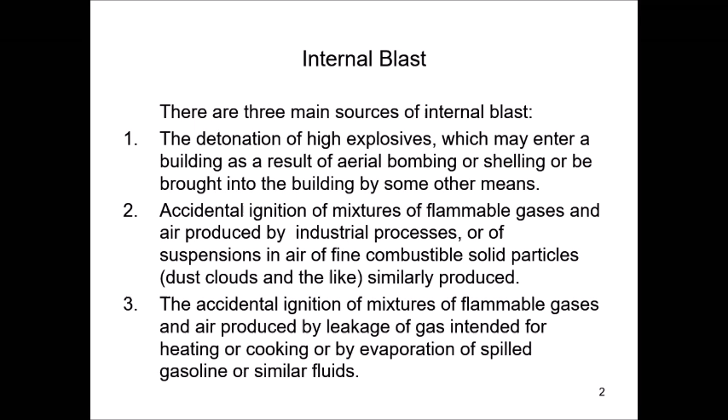In terms of characteristics of the resultant blast, the main distinction to be drawn is that between the detonation of high explosive and the deflagration, which is a more or less rapid explosion produced by gaseous mixtures or fine solid suspension.

The first, the detonation, is independent of atmospheric oxygen and leads to a very rapid production of large quantities of very high temperature gas in a very small space. That's a detonation.

This gives initially at the source of the explosion a very high but very localized pressure rise, which leads to a shock wave expanding away from the source at speeds greater than the speed of sound, and approximately 1,000 meters per second.

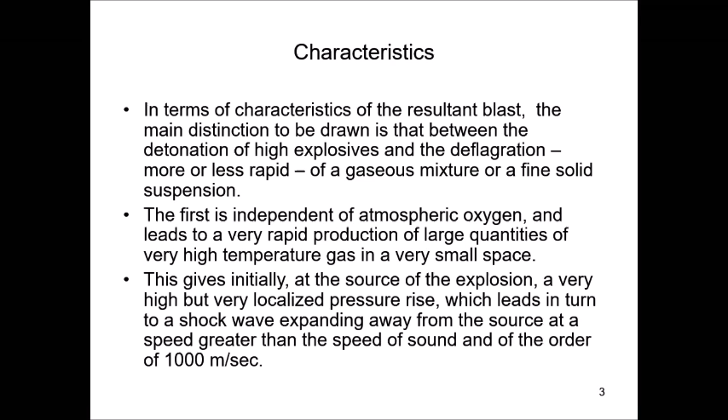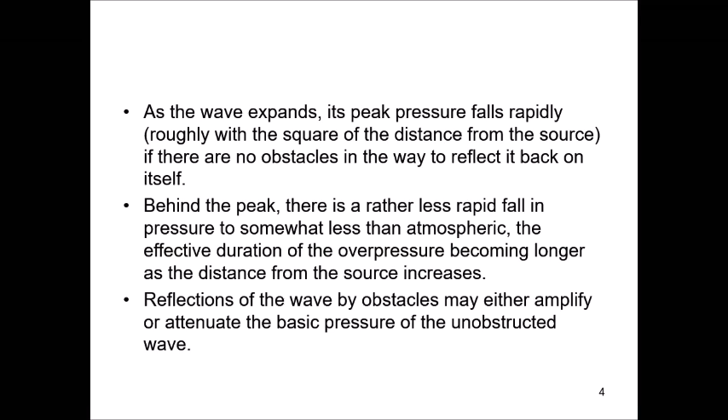As the wave expands, its peak pressure falls rapidly off with distance, and behind the peak there's a rather less rapid fall in pressure to somewhat less than atmospheric pressure. The effective duration of the overpressure becomes longer as the distance from the source increases, and reflections of the wave by obstacles may either amplify or attenuate the basic pressure.

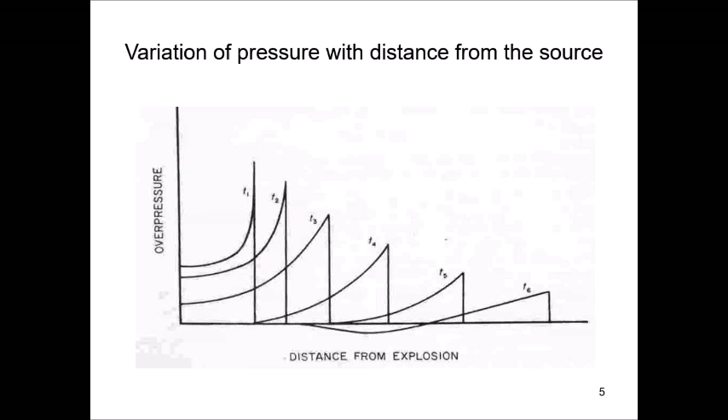This shows the variation of pressure from a detonation outside of a building, external to a building. As you can see, the pressure decreases with distance. We have the overpressure, distance, and at this point we have a positive phase duration and a negative phase duration. This is a characteristic shock emanating from the source.

But when the explosion takes place inside of a building, there will be reflections, even when some of the floors or walls have been blown apart. This will tend to prolong the duration of the pressure above atmospheric throughout the space.

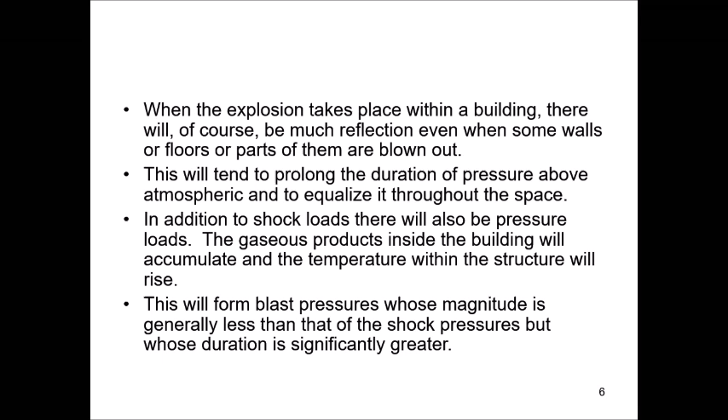In addition to shock loads, there will be also pressure loads. The gaseous products inside the building will accumulate and the temperature within the structure will rise. This will form blast pressures whose magnitude is generally less than that of the shock pressure, but whose duration is significantly greater. For example, this is a depiction of a point source explosion inside of an enclosure.

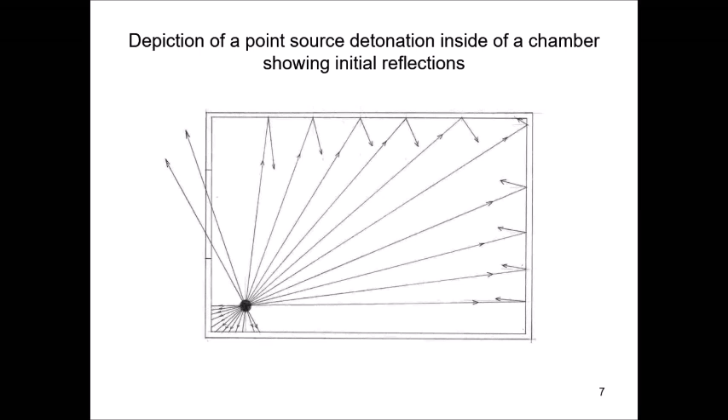So you see the ceiling, the walls, the floor, and you can see an opening at the left side. The explosion takes place in the lower left-hand corner, and you see reflections from the walls, as long as they are not blown apart. This is an approximate depiction of what can happen inside of a building.

This shows how the loading is going to be on the walls, ceilings, etc. You have a shock loading, which lasts a short time, and then the gaseous product loading lasts a lot longer because of the reflections of the product. Okay, so much for this basic stuff.

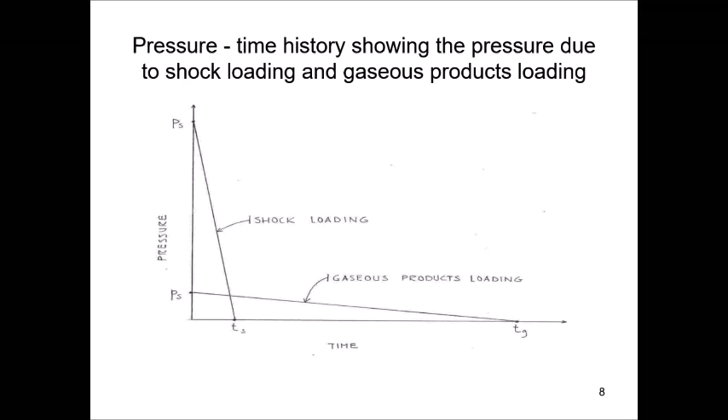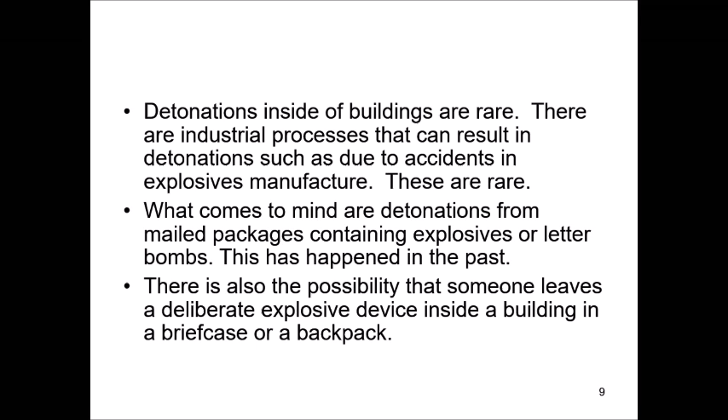But detonations inside of buildings are rare, very rare. They can be produced by processes that result in detonations, for example in manufacture. What comes to mind are detonations from mail packages containing explosives, or letter bombs. There's also the possibility of someone leaving a briefcase or a backpack containing explosives. So those could become detonations inside of buildings.

You may recall that the London Underground bombing, which took place on July 7, 2005, and the Madrid train bombing, which took place on March 11, 2004, can be considered internal explosions, where the terrorists brought on board backpacks containing explosives. These were relatively small bombs. Those in London weighed about 10 pounds each, and those in Madrid about 22 pounds each.

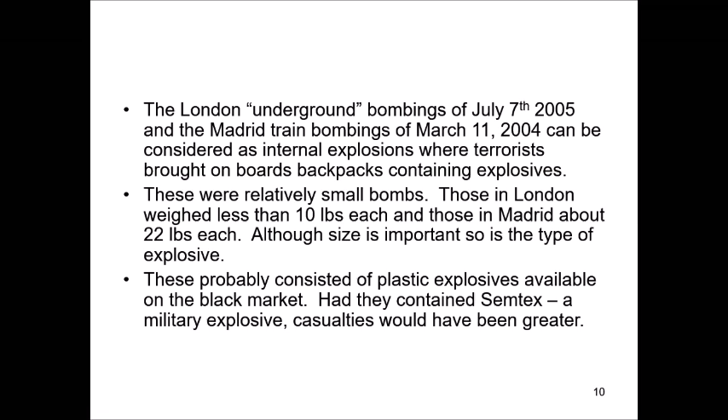The size is important, but so is the type of explosive that's important. These explosives probably consisted of plastic explosives, which are available on the black market. Had they contained Semtex, a military explosive, casualties would have been much greater.

Now let me briefly introduce one small subject, internal explosions produced by aerial bombs. This is a World War II experience.

What I'm going to show you here is a report produced by an engineer of an explosion which took place in London, England. You will notice it took place in 1943, May 1943. So what happened here is a German bomb weighing 550 pounds hit the roof of this building.

It broke the roof, broke the second floor, first floor, and exploded in the basement. This picture shows the shock waves emanating from the explosion. It shows the damage produced by the blast, both in this picture and in the plan view. This was a very long sheet, so I had to break it into two parts. This part shows the damage to the floor systems. The cracks are shown over here.

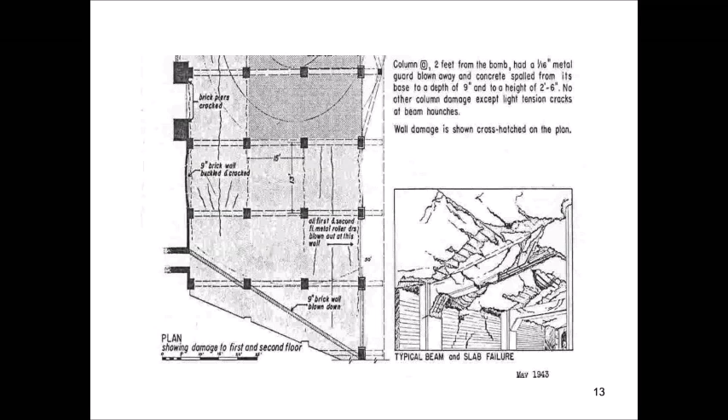Over on the right side, you see a picture of what happened to slab and beams inside that building. This whole report was prepared by an engineer in England in 1943, and the pictures are shown on the left side, description of damage. The building is described, damage is described, and this is done very well.

Keep in mind that this took place in 1943. Cameras were not available at that time like we have now. So you see, this was done by an engineer who very carefully went out to the site, inspected the damage, made a lot of sketches, drew things up by hand, and did a very good job. It impressed me very much what can be done without a camera. This was a very well done report, one-page report, and it shows you an internal explosion produced by an aerial bomb.

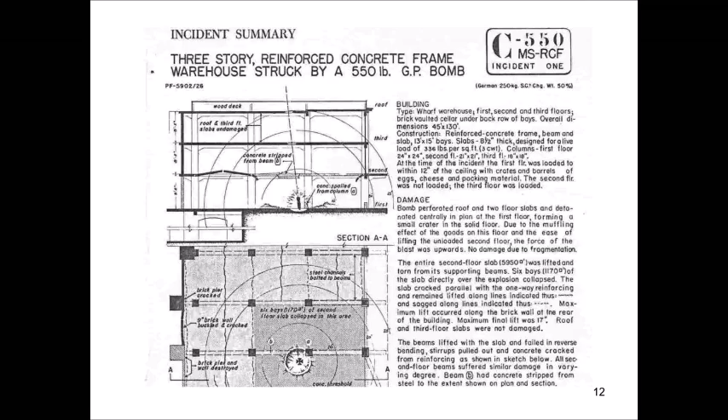Okay, now we get to the main topic of this presentation, the internal explosion inside the World Trade Center, which took place on February 26, 1993. It's a long time ago now, but still it was an important event.

On Friday, February 26, 1993, about 1,800 pounds of explosives ripped through the 6 sub-basement floors that housed operations such as maintenance offices, primary and secondary power plants, fire safety, communication, refrigeration systems, and public parking, tenant and public parking. The man drove up in this van containing these explosives, left it there, and detonated it.

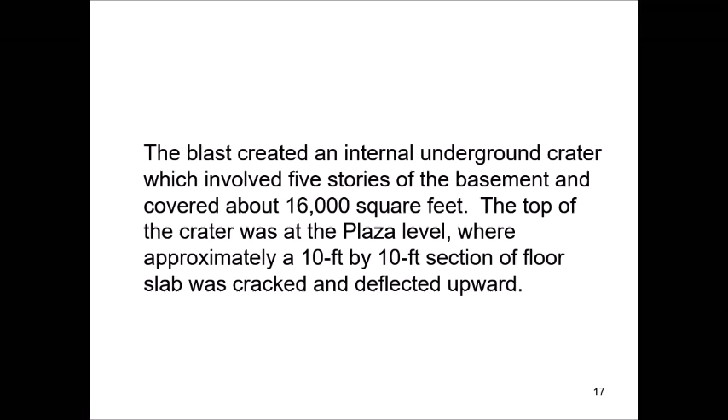On the next level, the concourse - let me go back here. So this is the concourse. On the concourse level, a plaster on lath ceiling collapsed in the lobby of the Vista Hotel. Directly below the collapsed ceiling, there was a hole in the slab of approximately 18 by 22 feet, which is about 396 square feet, made by the explosion below.

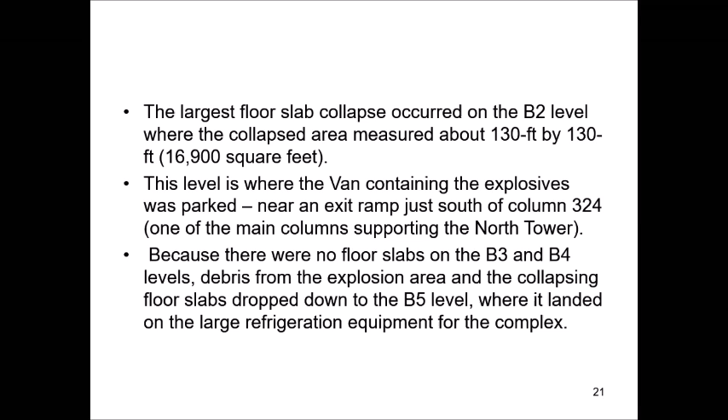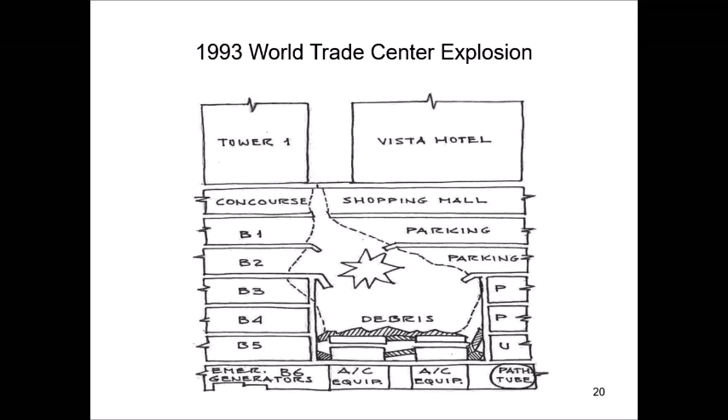So we go next to here. Because there were no floor slabs at B3 and B4 level, there were no floors. There were no floor slabs, so the debris fell down onto the AC equipment.

This again shows the same thing we just talked about. You see the Vista Hotel, you see level B2 where the van was parked, and that's where the explosion took place. And then you see B3 and B4 levels had no floor slabs. So basically 2 floor slabs were damaged.

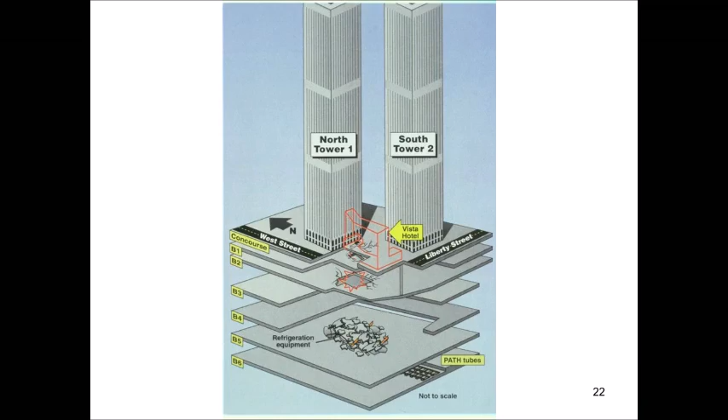And even into the Vista Hotel, the floor was damaged. So this was a big explosion. And you can see the 2 towers and so on. So let's go on, so what was used?

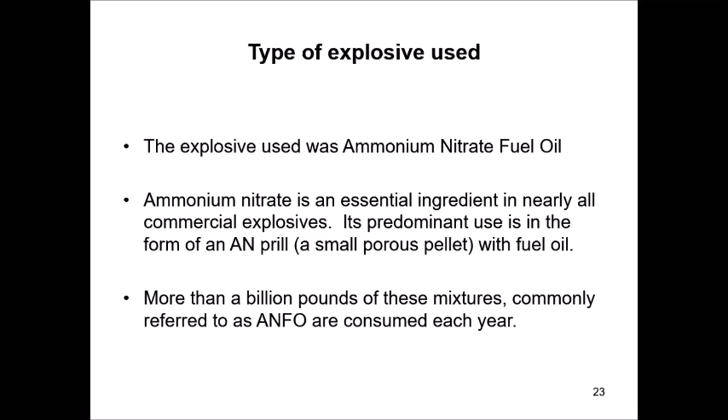The explosive used was ammonium nitrate fuel oil. And ammonium nitrate is an essential ingredient in nearly all commercial explosives in this country. More than 1 billion pounds of these mixtures, commonly referred to as ANFO, are consumed each year in the States. They account for approximately 80% of the domestic commercial explosive market.

ANFO products have found extensive use in a variety of blasting operations: surface mining, metal mining, quarrying, construction. Their popularity has increased because of economy and convenience. The most widely used ANFO product is an oxygen-balanced, free-flowing mixture of about 94% ammonium nitrate prills and 6% number 2 diesel fuel oil.

And of course, you need to have blasting caps to set the whole thing off. You need to know how to mix it properly. And apparently this particular person who did that was quite adept at doing what needs to be done to create a good explosion.

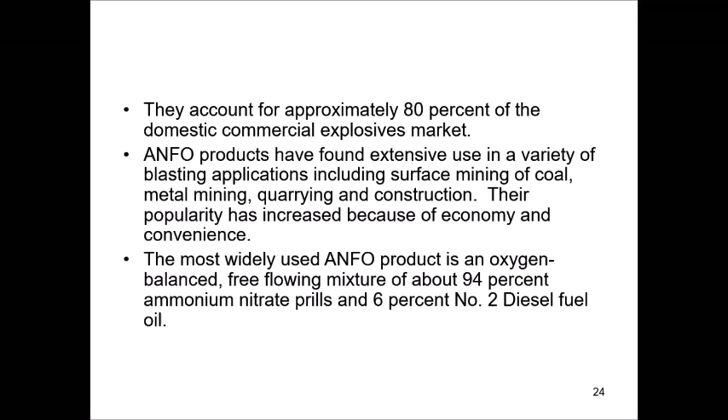Other damage in the basement area: concrete block walls on the B1 and B2 levels were severely damaged. Damaged walls included those enclosing rooms, stairways, elevator shafts. The damaged walls were as far away as 550 feet from the blast area.

I can't tell you how many meters that is, but that's about 180 meters. So 180 meters away from the explosion, the walls were destroyed.

Many metal doors were bent and distorted, and some doors were knocked out of their frames. Approximately 200 cars parked in areas adjacent to the crater were heavily damaged. Cars closest to the explosion were rolled over, ripped apart, and dented on surfaces, and many of them burned. Cars more than 100 feet away from the edge of the crater were also dented.

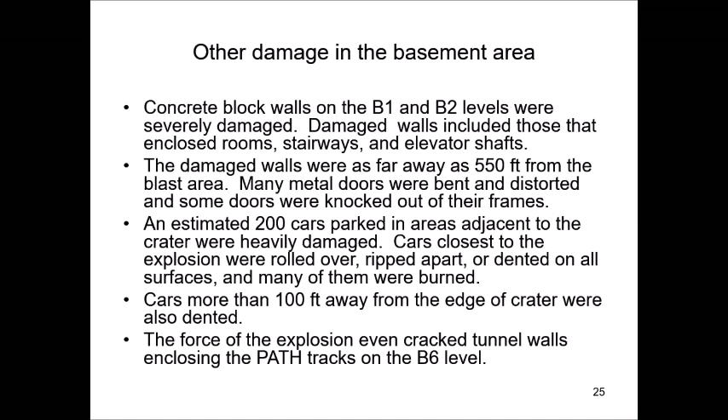The force of the explosion even cracked tunnel walls enclosing the PATH tracks at the subway at the B6 level.

I made some calculations to show what the pressures were at different distances from the explosion. So you see, at 10 feet away from the explosion, the pressure was incident 1,300 pounds per square inch. And then at 100 feet, etc. At 550 feet it was 1 pound per square inch. Well, 1 pound per square inch is still a high intensity explosion. This may not be too important to you, but still it gives you an idea what the pressures were inside the basement.

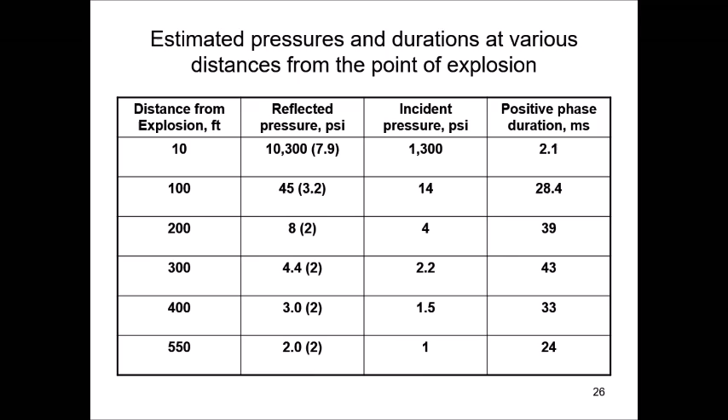The demolition contractor removed approximately 4,800 tons of debris. The repair crew attached 180 braces to damaged columns. 1,042 people were injured, mostly due to smoke inhalation.

There were also 15 persons who suffered blast injuries. Six people were fatalities. Okay, the next 4 slides show the crater area, blown out slabs, damaged columns, etc., and temporary column braces.

Now this is kind of an important slide. You see what happened here. You can see that this... I have something obstructing my view over here, but that's okay. What you see is that here are the slabs, missing slabs.

So you see, you design a column to be between 2 floor slabs. The floor slabs provide resistance, so the column doesn't buckle. But here, the slabs were gone, so the whole column over here was like 40 feet long now. Well, before that, it was maybe 15 to 20 feet long. So the columns were in danger of buckling after the explosion.

Okay, so that's kind of important. Now, what you see are the steel bracing. Those were put in after to make sure that the building doesn't buckle or collapse.

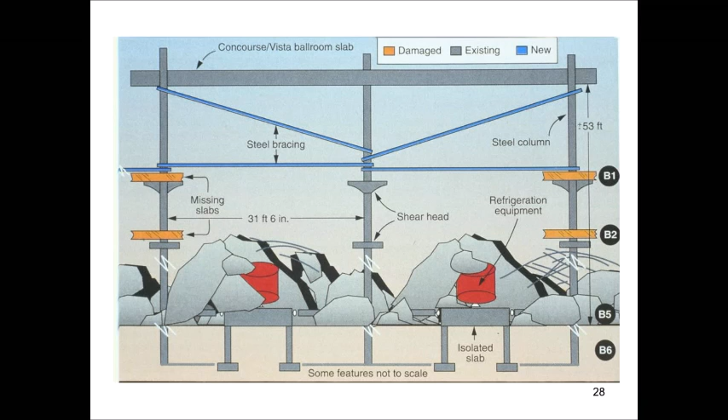Okay, now let's go further. So here, if you were an engineer to step into this building and you were told to try to fix it, or tell people how to fix it, what to do, this is what you would see.

What you see here are the column capitals, at several levels. They're gone. The slabs are gone.

Now, what the engineers did - it took the engineers. City of New York hired maybe 6 or 8 different engineering firms. WJE, the firm I worked for, was also hired. Our office in Princeton, New Jersey took the job, so our office directly here in Northbrook wasn't involved. I was involved only at the edge of it, so I knew what was going on, I saw what was going on.

So you see what we did. We brought in - it took more than a week, probably more, 2 weeks. We were worried about the columns buckling, something happening. So you see the walkways at the top - those were put in to walk around, so we could go from column to column, and the workers could brace those columns.

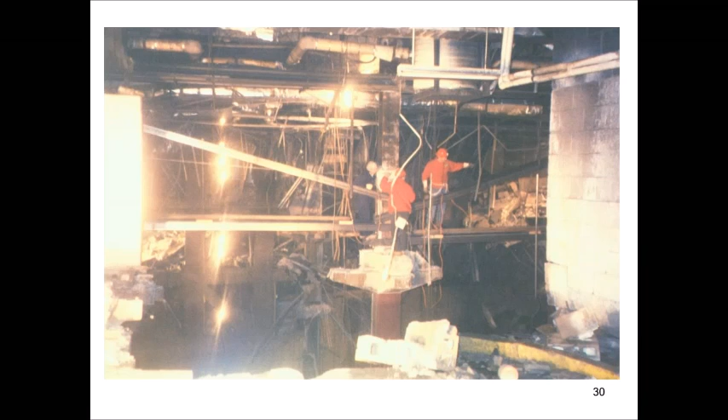Okay, let's go to another slide. This is another view of the same thing. You see column capitals, and you can see the braces which were put in. You see the workers welding the braces to the columns so the columns would not buckle.

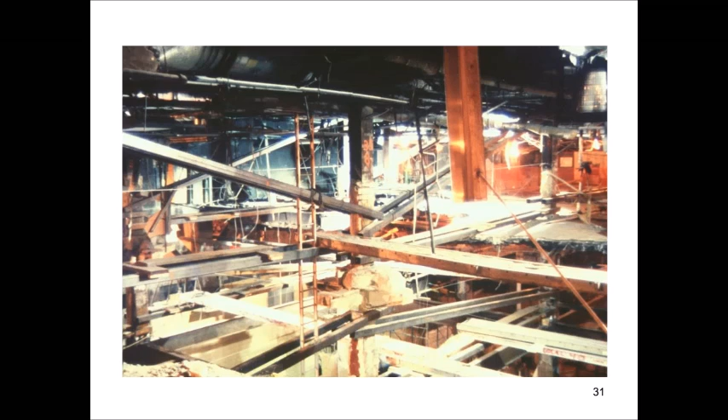Now we can go further here. Here's another view of the whole area. You can see how large the area was, how many slabs collapsed, and how much work had to be done to put in walkways - wooden and metal - and brace the columns and weld it, which took several weeks to do. Many workmen were involved, supply companies were involved.

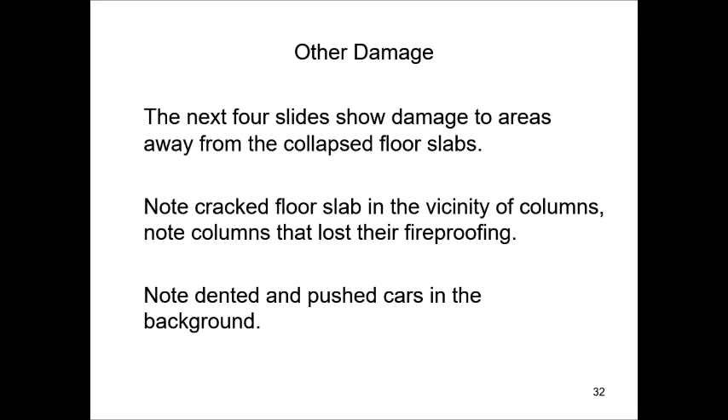Okay, other damage. The next 4 slides show damage to areas away from the collapsed floor slabs. You will note cracked floor slab in the vicinity of a column, columns that lost their fireproofing, and dented, pushed cars in the background.

Now you know that when you design a floor slab, you design it for vertical loading, so we put reinforcement at the bottom level. If an explosion occurs below and the loading is from below on the slab, that reinforcement doesn't help very much, and the slab breaks much quicker, more easily I should say.

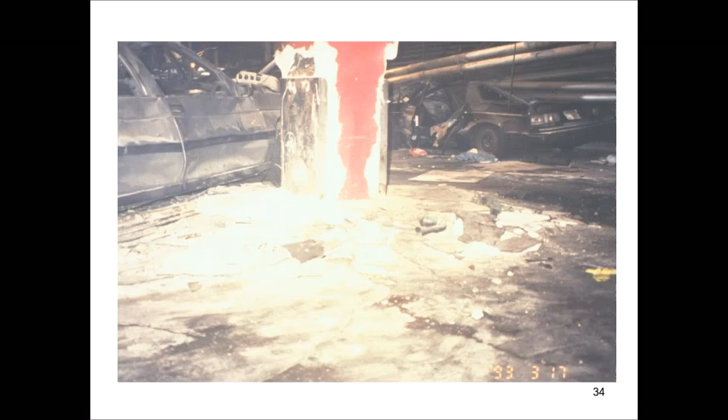Here's another column where part of the concrete fireproofing has been blown off. I'd like you to take note of the dented cars. On both sides you see dented cars pushed aside and dented.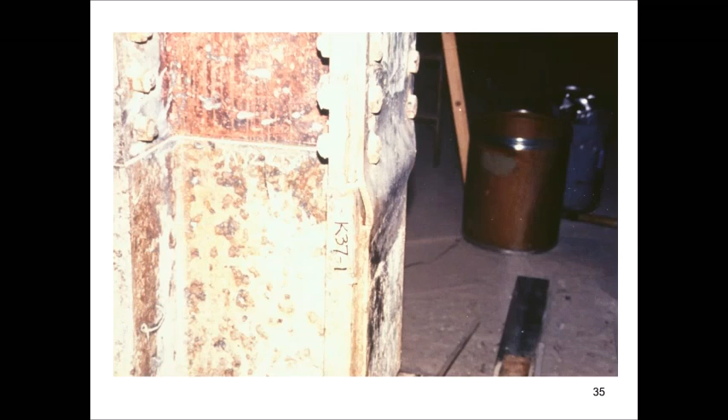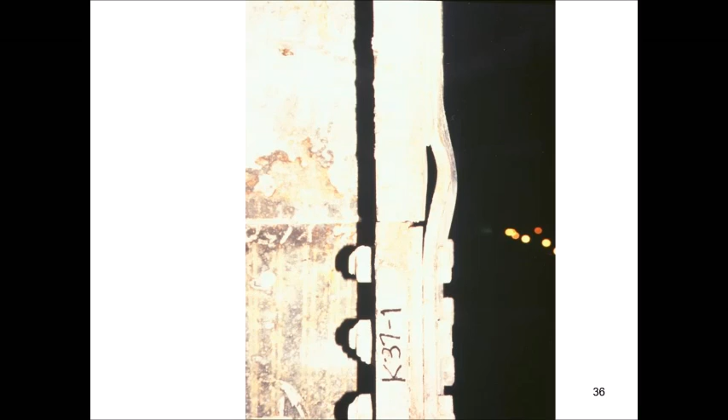Here is a column which lost all of its fireproofing, and you see the bent steel plate slab over here. We didn't know what happened, how it could bend like that. But you can see over here, it's the same column showing that dented slab - it took a lot of pressure to blow off that fireproofing.

Conclusions. First of all, the same quantity of explosive, if exploded next to this building, are not likely to have produced as much damage as when exploded inside. Confinement increases the effectiveness of an explosion, as I mentioned early in this talk. Several of the floors were loaded from below, and in this manner they fail easily because slabs are reinforced for gravity loads and have only minimal resistance against an upward load.

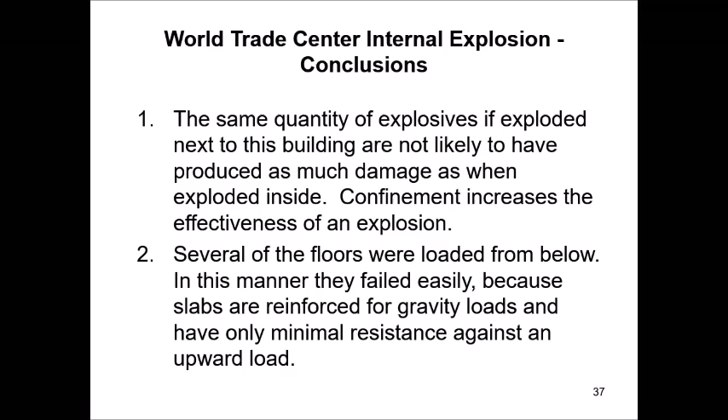Significant portions failed on several floors and thus removed lateral support to the column, as you saw earlier. However, the building did not appear to experience any local instability. Structures are very good - structures share loads. If a member gets removed, the other members will try to share the load.

Post-mortem reports indicate that numerous cars were set on fire. However, the fire problem in the garage was minimal. The collapsed slabs tended to minimize the fire problem because many cars were dumped into the pit below.

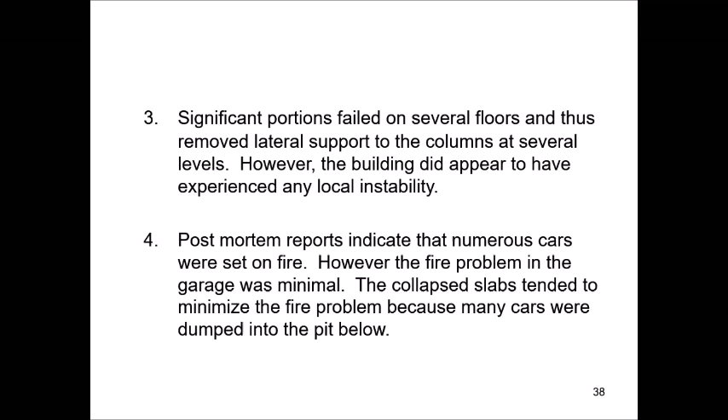Casualties. The smoke, which caused 1,000 minor injuries, was caused by numerous burning cars, mostly on the B2 level. 6 building occupants died immediately from injuries sustained during the explosion. 4 of the victims were Port Authority employees in an employee lounge on B2 level, Tower 1 - the room was separated from the explosion area by a concrete block wall, which was destroyed by the blast. The 5th victim was returning to his car in the sub-level garage when the explosion occurred. The 6th victim was last seen in the food commissary on the B1 level shortly before the explosion occurred.

In all, 1,042 people were injured, including 15 who suffered blast-related traumatic injuries, such as being cut by broken glass, for example.

Okay, that's the end of my talk on the World Trade Center. So I was asked to tell you something about the project we had here not long ago.

I teach a course called Engineering Aspects in Homeland Security. What I do there, as Federico can tell you, is break up the class into groups, and each group does a project dealing with some aspect of terrorism.